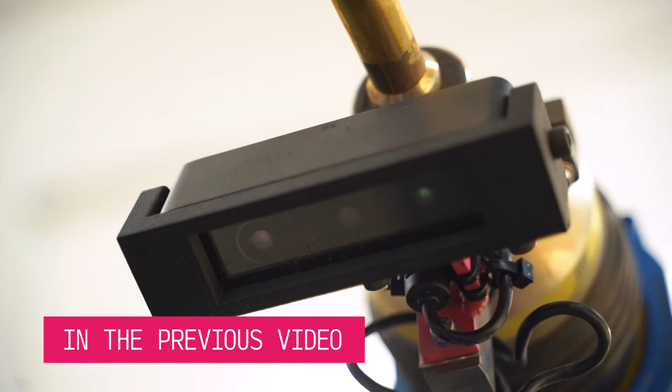This is our sensor. It's a depth camera, or we call it a snapshot scanner sometimes. And that's how the robot can see. If you don't trust it, I can put my cell phone in there.

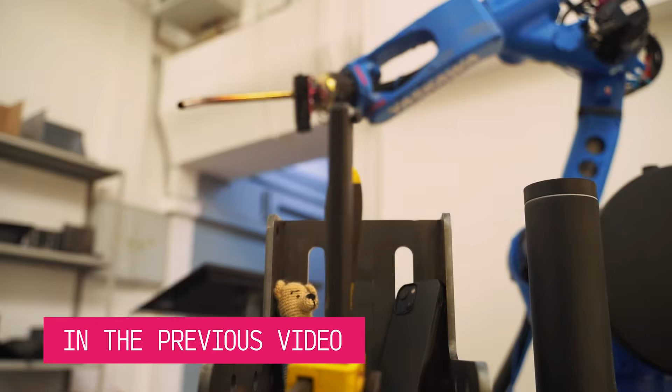Oh, the little teddy. Here's your little teddy bear, my phone, my cup, all scanned, and the clamp.

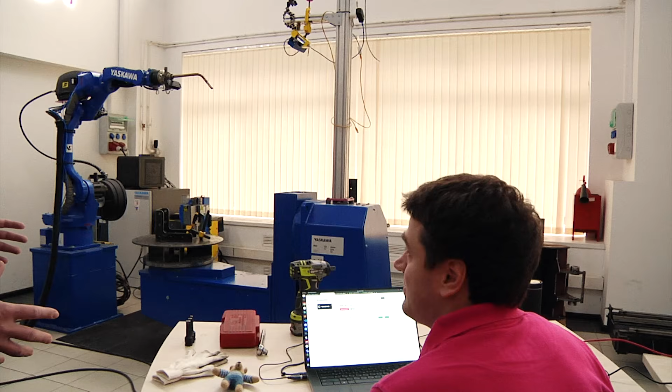Impressive. Can we try it with something bigger? Yeah, it's very often when people use big rigs. We have an example here. Our welding engineers use this thing.

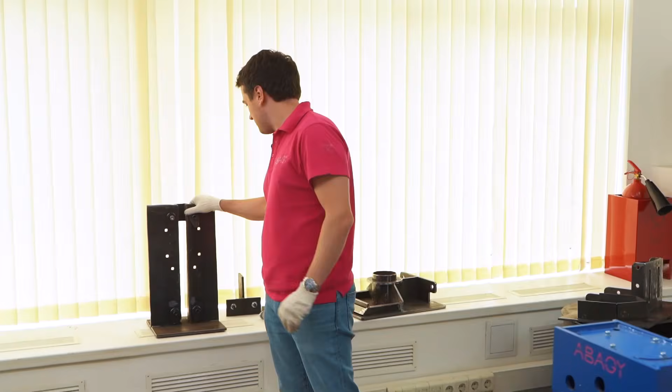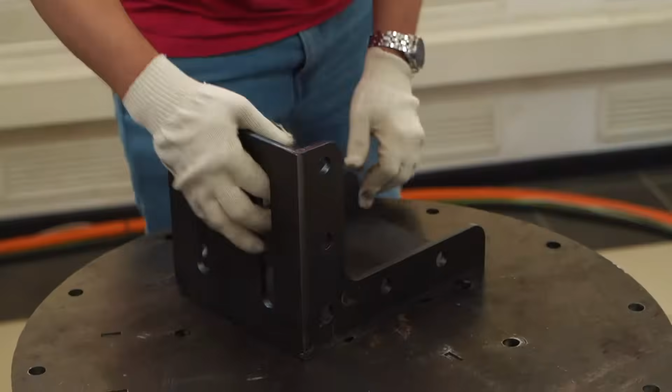You see, we'll insert some part in here. Let me do that. It's heavy.

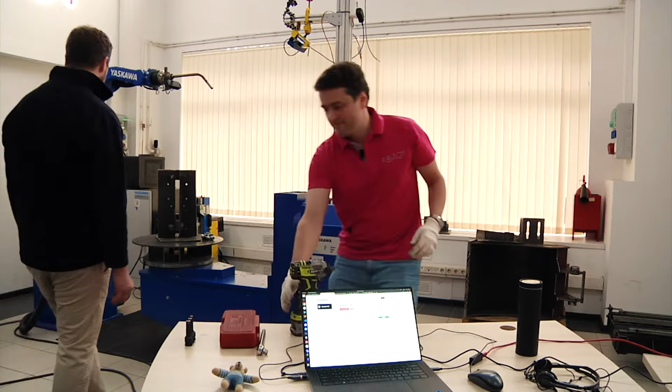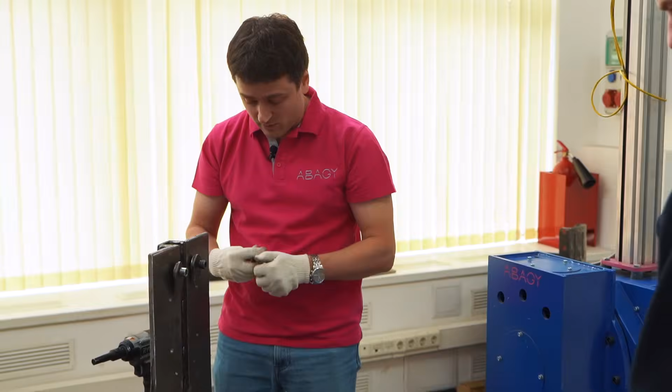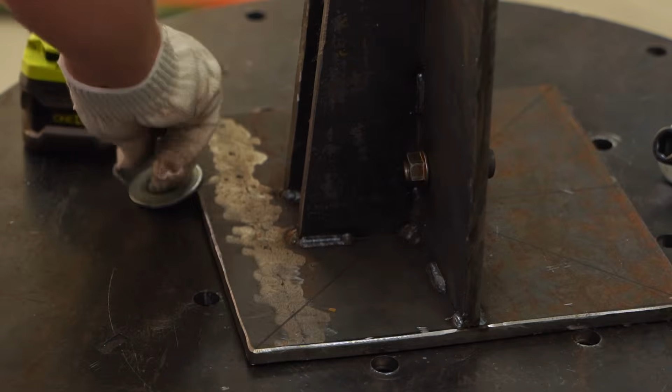There can be different kinds of fixtures on real production because it's a very individual thing, and many of our clients use their own rigging or fixtures. For us, it's not a problem. As I said, we don't use any model for the clamps or for fixtures, so it's fine. The interesting thing is that this rigging is basically bigger than the part, so the part is smaller than the fixture.

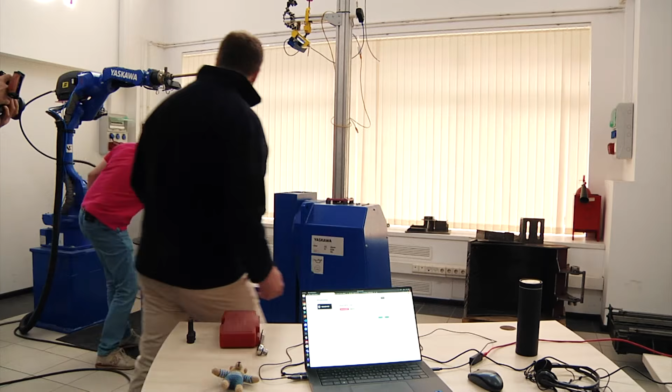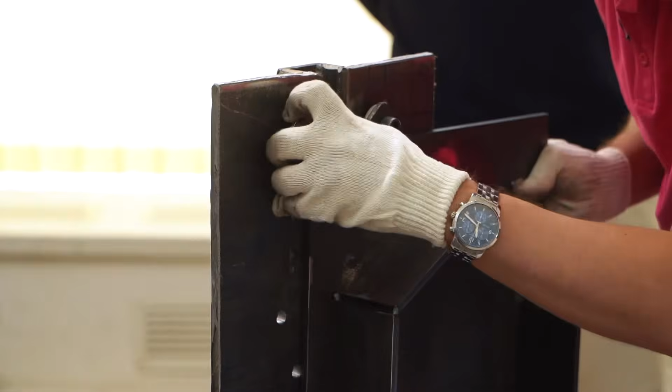Cool. Excellent. Now our part goes in here, yeah? Yeah. Okay. Right, yeah, I'm gonna fix it.

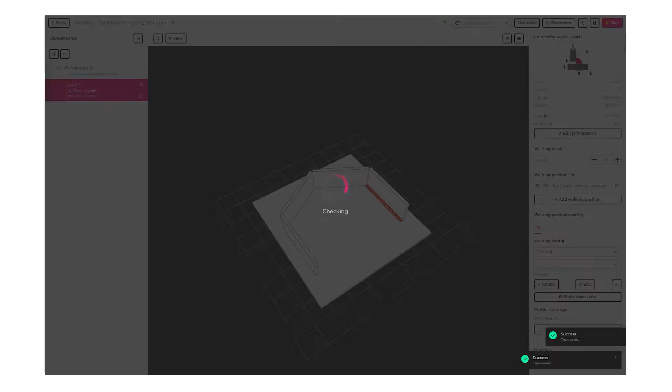So we select this part. Here we have a model. I selected one weld. It's gonna be PB orientation, so now the positioner will rotate when we're welding it. Again I do check reachability, add to cell, full scanning, and just run it.

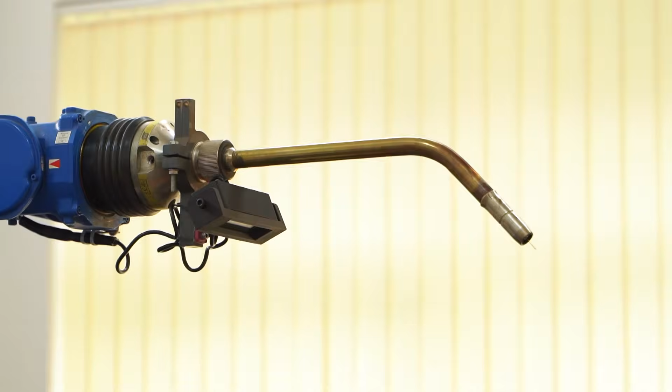And the 3D camera here, that hasn't seen this before? No, never. So this is the first time the 3D camera is going to see this whole thing.

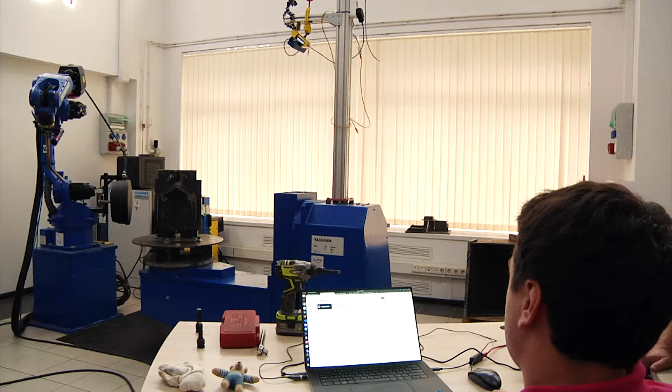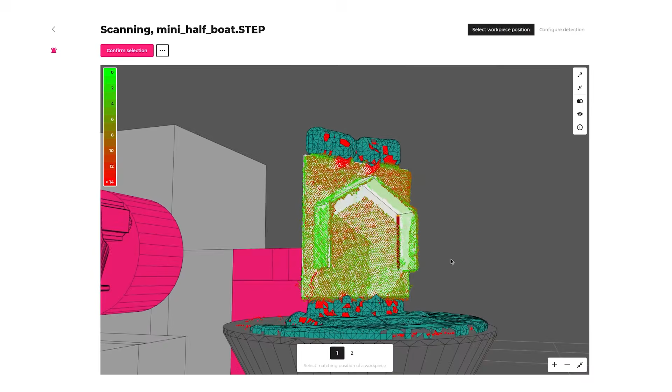So here you see that now the part is here, and the whole huge rigging is here. That's beautiful. We can see it, and we won't collide into it. And the system has told you that it's ready to go? Yeah.

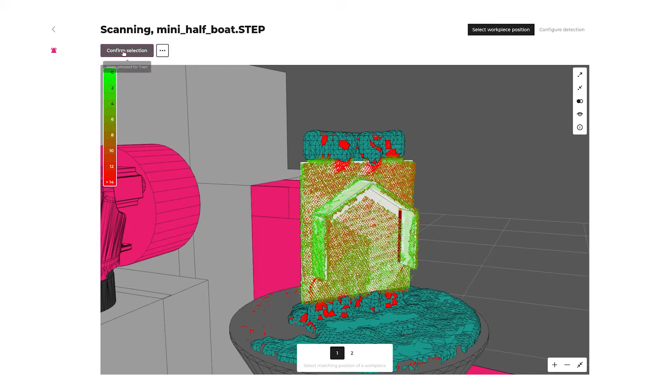And if you want, you can weld. You can, if you don't like it, for example for some reason you see that something is not recognized, you can always stop execution or rescan it if you want, or even change some parameters. But now everything is totally fine, so we can just confirm and see how it's going to weld the joint that we selected. Okay, ready to go. We can go again and see.

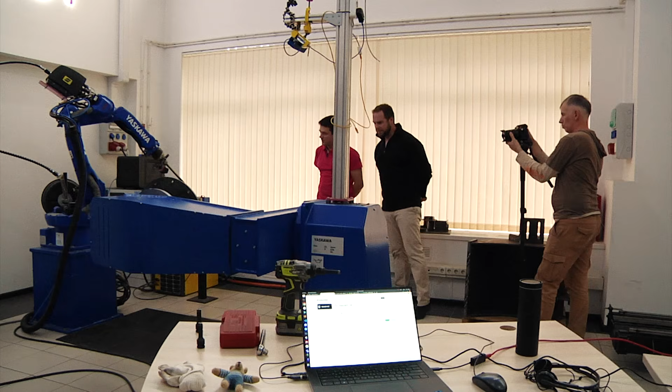So now it's touching. You know, there are 5 senses, right? Vision, touching, hearing, smelling, and what? And tasting. Taste, yeah. So our robots can do 2 of them.

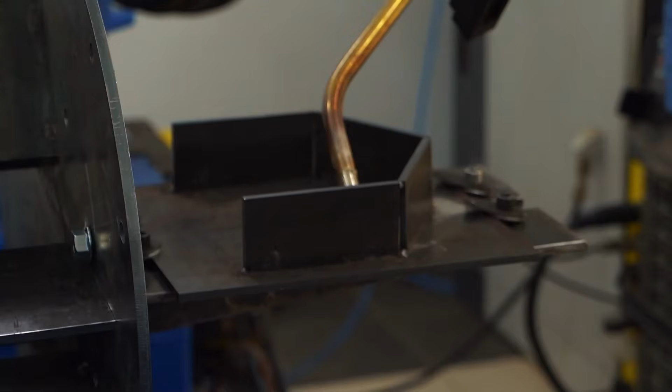And again, it really precisely goes directly into the weld as it should be.

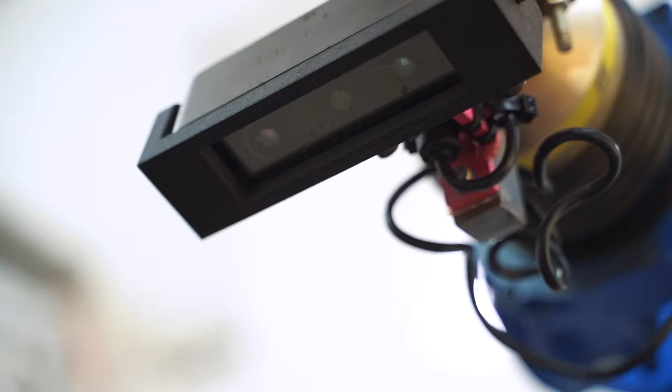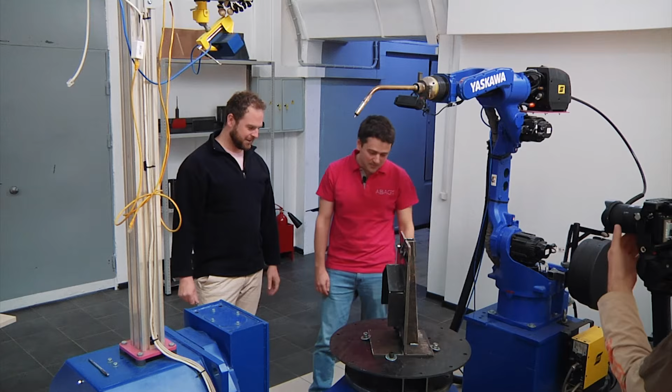So I called it a 3D camera. Is that correct? Yeah, it's different from an ordinary camera because it also captures depth. So we get 3D information. This is the ordinary camera, and this is the depth camera. So this catches depth, and we can convert it to point clouds that you saw on the screen. And we use different cameras.

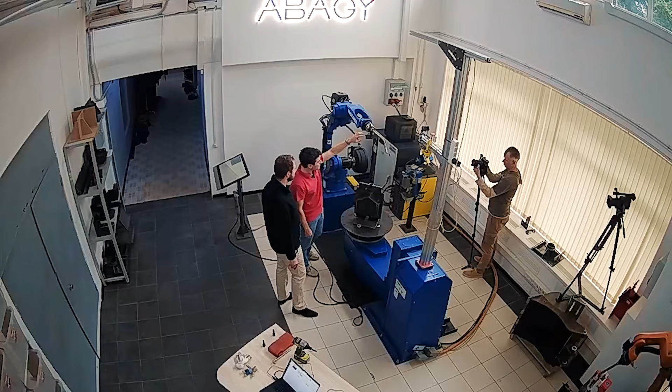This one is very small, and it's relatively cheap, but it gives a bit less quality. But it's small and cheap, so we can install it on a robotic arm, and it does not influence the reachability. So you see the torch, and sometimes we need to get to some really tiny, really small spaces, and this camera lets us do it.

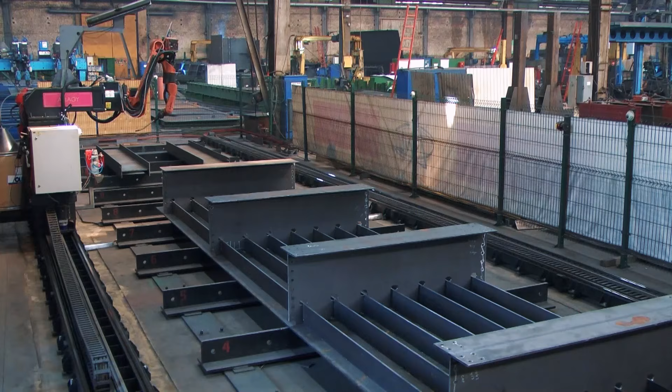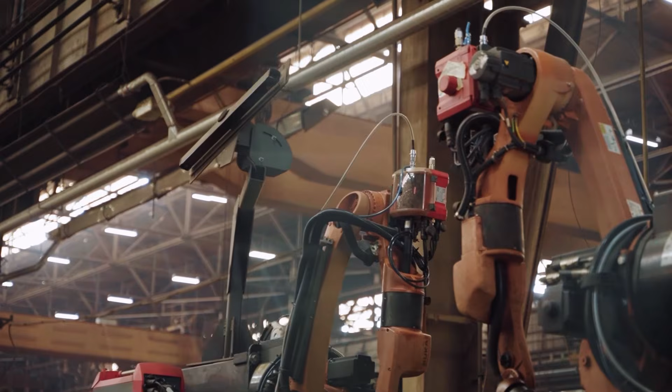Some of our clients don't use rigs or any kind of clamps, so they just have huge pieces. And in this case, we use that camera, the big one that is installed on the track.

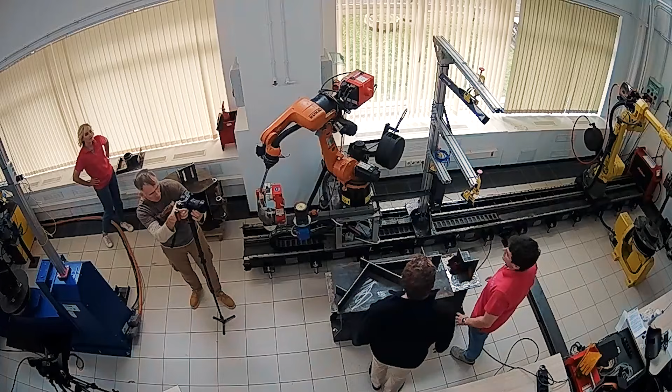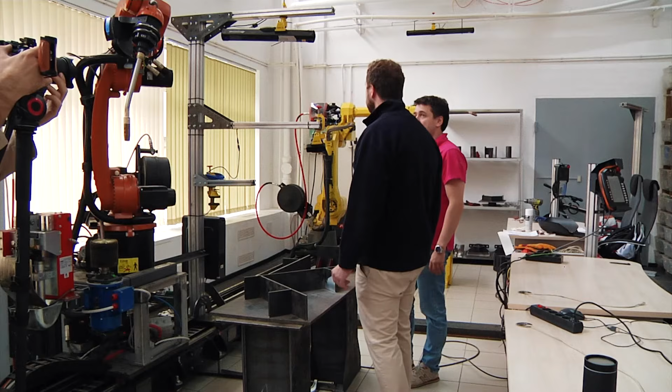If you want to scan something bigger, you need a guy like this. This scanner has a much bigger field of view, and it's much more expensive, and the quality is much higher. So the accuracy of this scanner is sub-millimeter, I think. Where's the lens? The lens is on this side, and the projector is on this side.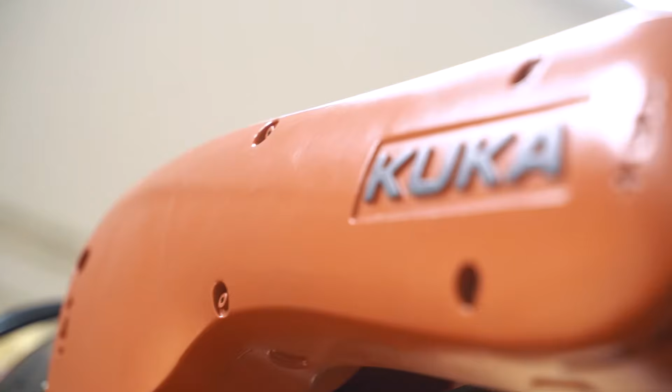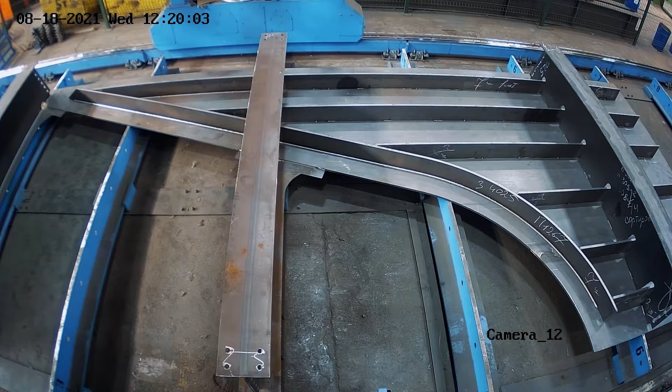Cool. And you can see that it's too big to be mounted on the robot arm itself, not like that one. So we mount it on the linear axis. You see this thing is attached to the track, and it moves together with the robot. It has a wide field of view and good quality, but the thing is that you can't see from different angles. But in this application, it's not needed.

For many of our clients, they don't use any kind of clamps or rigging, and it's okay for them. What kind of thing would you... Do you mean what kind of parts? Yeah. Something like this. This is like a minimized version of real parts.

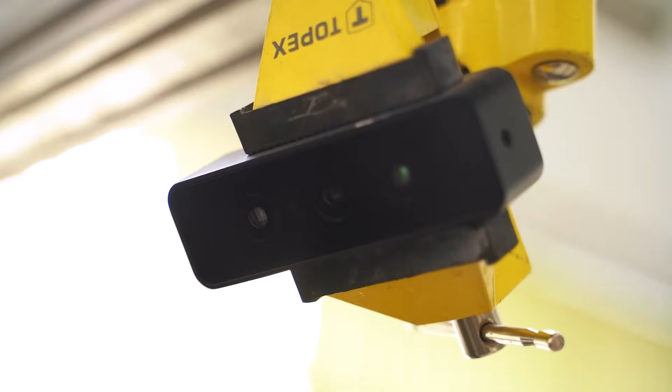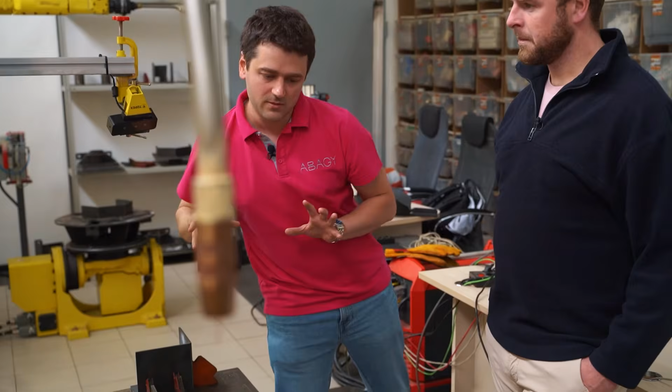Another thing is that we can combine. So on this cell you can see both of them, big guy and small guy. They work together, no problem. So it increases the visibility because this guy sees the part from this side, and this guy sees more to the front. And this is the way it works.

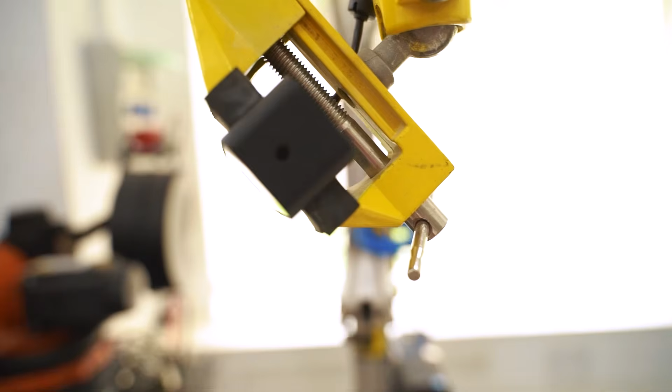So higher quality, higher price, wider field of view; lower quality, lower price, lower field of view, lower size. And we have another guy over there. It's the same as this one, but with a huge field of view. And it works with the yellow robot. And I can show you how it all works.

Cool. Let's go. So let's scan.

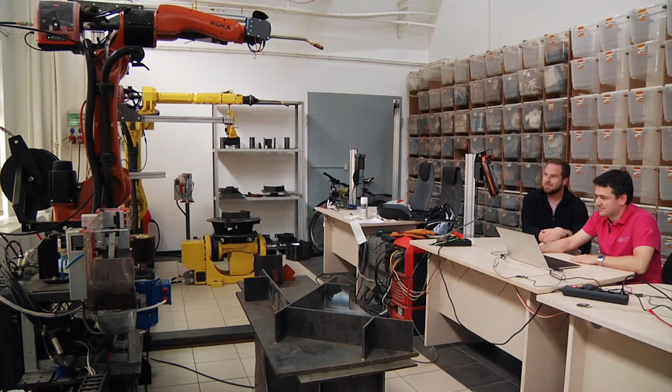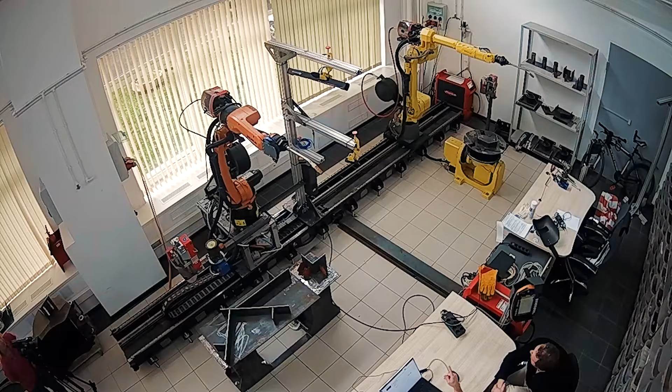So you see it now moves only along the track. And you can see the red blinking light, it's a laser projector working. You can't see the projector of the small guy because it's infrared, but you can see the projector of the big guy, which is like just a regular red light.

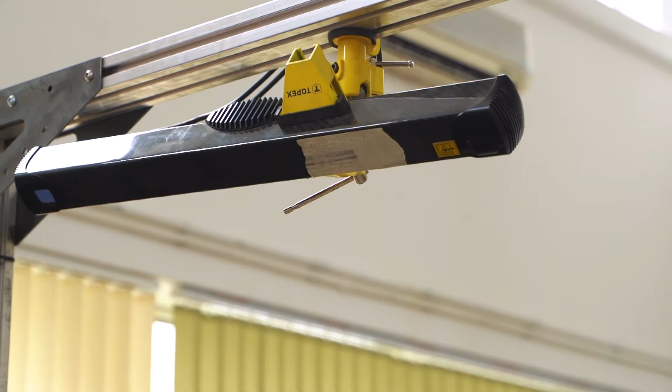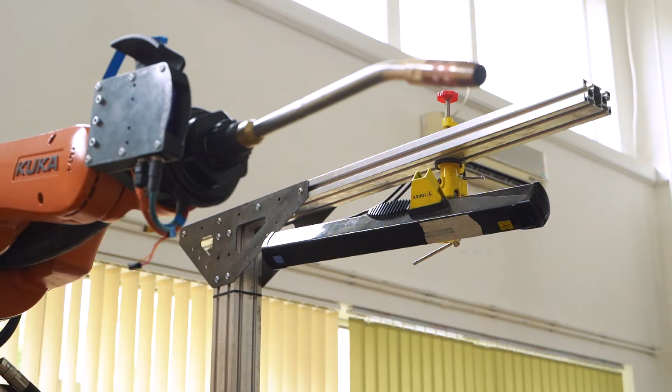Yeah, that's it. You saw it can do it only in 3 shots. Now here's the result. Lots of green, it's all green because everything is good. Only this part is red because it's far from the model and it's just kind of an obstacle.

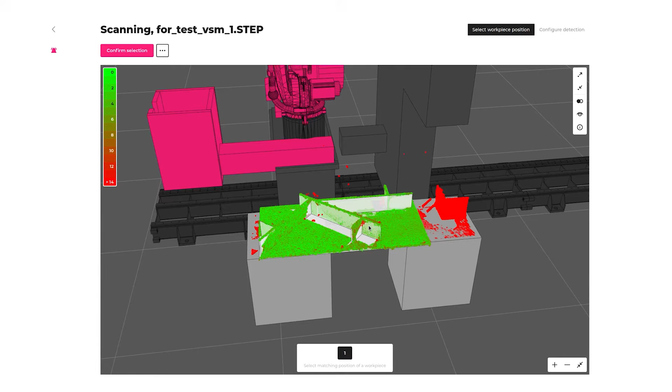But on this cell, we actually disabled the detection of obstacles because we know that by design of the cell, we can't see the part from this side, only from that side. That's why we don't have points here, you see? We have points here, but we don't have points here. It's a shadow zone. Here you can see that some parts of our object are in the shadow, so we don't have points here.

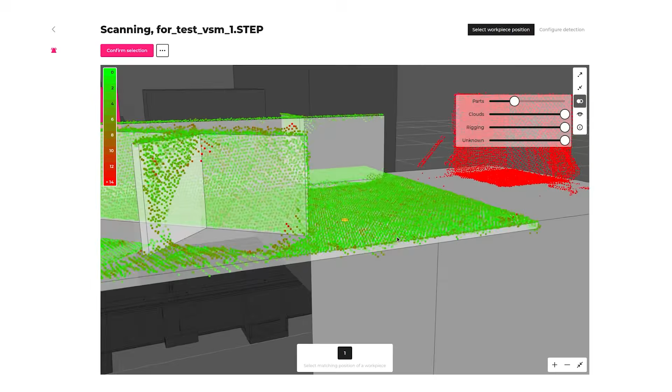But the quality of the scan is really high. As I said, we can change the opacity. And here you can see that the points are really flat, even though we scan it from a really big distance. The scanner is over there, so it's like 2 meters here, and it's still really high quality. It's expensive and big - this is the reason for high quality.

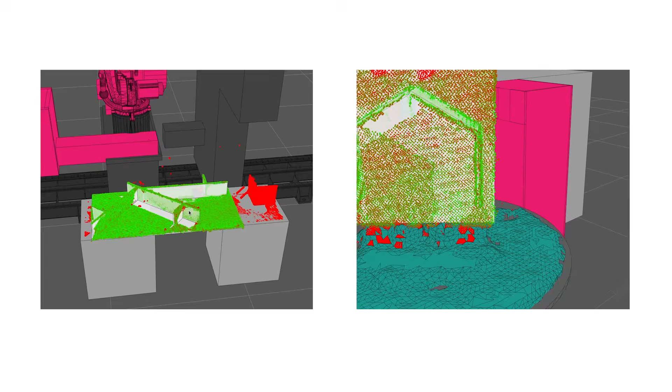And if we go back to that cell where we have the small guy, it's really nice that it's small, but the quality is lower. We can see some noise, but it's not a big deal for us still. It's just a difference, and we can work with different devices.

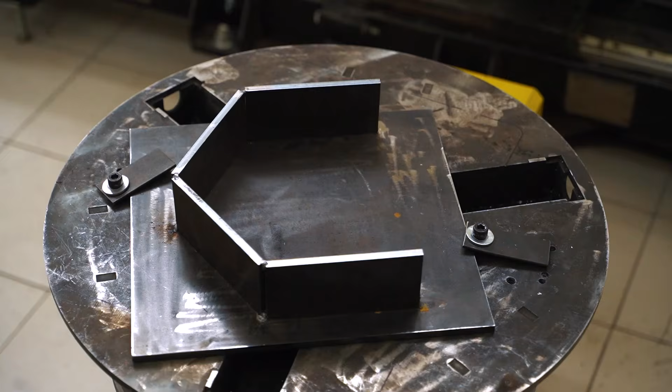So we can try to scan with that guy. It's also really interesting because it has a huge field of view. So let's just do it. And it's going to scan a part similar to the... Yeah, the scanner is on the wall, so we use only the positioner for rotation. The positioner bends, so the angle between the part and the scanner is optimal, and then it just rotates so the scanner can see this part from different sides.

And this is the same part as we have on that cell, so we can compare the quality of the scans. The good thing is that we are really flexible with the scanners in our system. You see that one is mounted on the wall, this one is mounted on track, and that one is mounted on the robot arm.

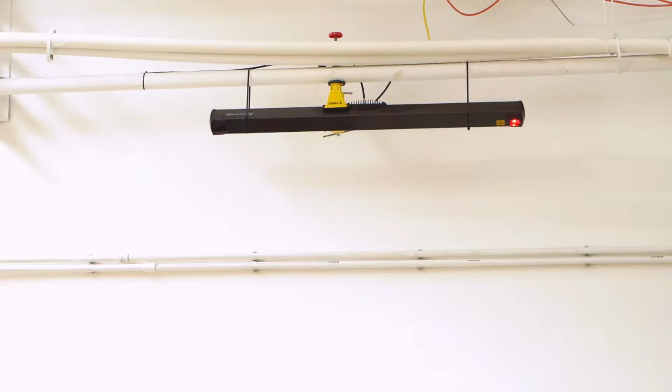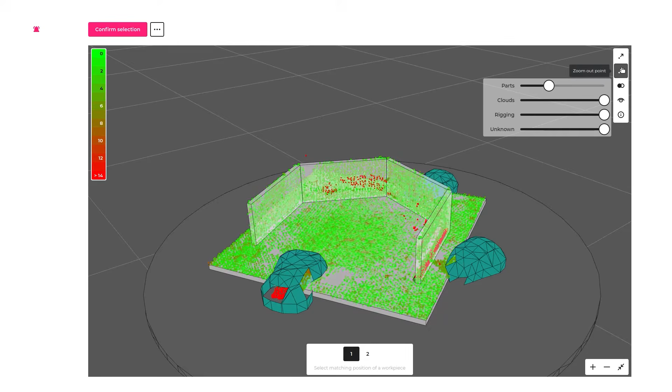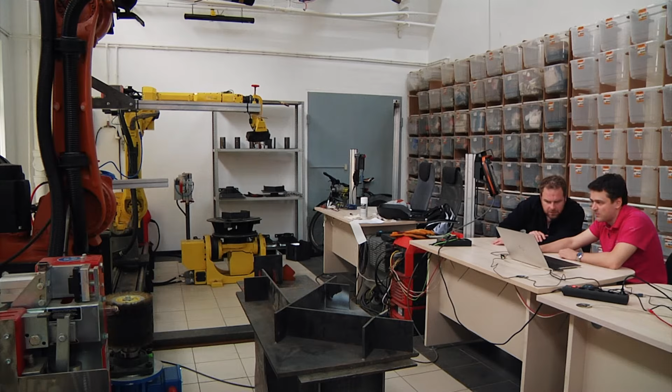Again, we can compare it with the data from another scanner. And here you see that more data is like fluctuating and so on. So yeah, that's the difference between the scanners. Great, cool.

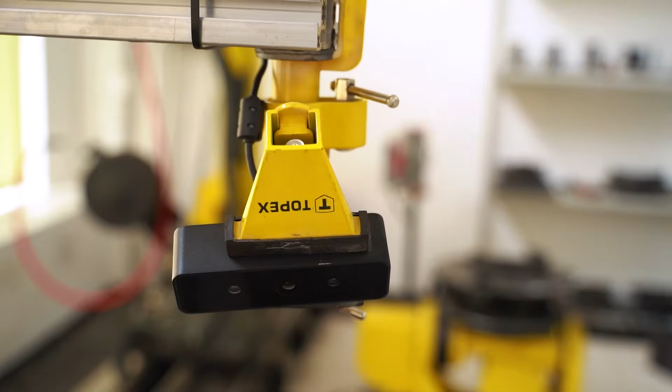So do you use machine learning and AI? Yeah, AI, definitely yes, because AI is really trendy and really powerful, but we use it only in some particular places where it is really well suitable. Such as? I can't get you into the details that much because it's our intellectual property. But yeah, I think that we are combining it in a clever way with other mathematical methods and algorithms, which don't rely that much on data, because data collection and markup for AI is really difficult task.

Who writes the algorithms? We, engineers. And I should say that we have our own algorithms, so they are state-of-the-art. It's not that we used some algorithms from some open source library or something like that. Many of the key algorithms in our system are developed by us. So they're proprietary. Proprietary, yeah.

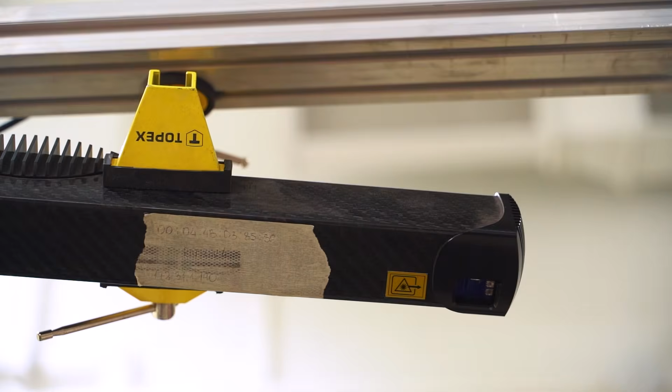So what's the difference in sensitivity between the human eye and what we have here? Okay, first off, I would start with accuracy. As far as I know, human eye accuracy is about 1/3 of a millimeter. And with these scanners, we also have sub-millimeter accuracy for the point cloud, for the point cloud Z noise. But a very different thing is that the human eye can recognize, because our brain can recognize well, and these are just sensors. To help them to recognize, we need to develop some algorithms.

And you mentioned AI. AI is really good for recognition tasks. Human eye is a clever sensor, but it's because it's connected to our brain. And here, our sensors are connected to the brain of the Abagy system, which lives here or in the ABAGY box.

Great. Cool. Dima, thanks. No problem.